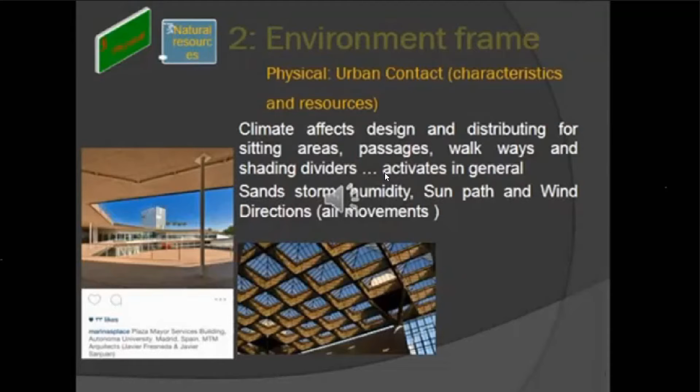These spaces should attract the teenagers, which is almost the age of the users and the students, as well as the staff members, to be in relation within the urban context.

We have to again focus on some changes happening in the environment related to circumstances like Corona and whatever. So how far, when we accommodate a design, can we find the distances and supply the information to be on the safe side.

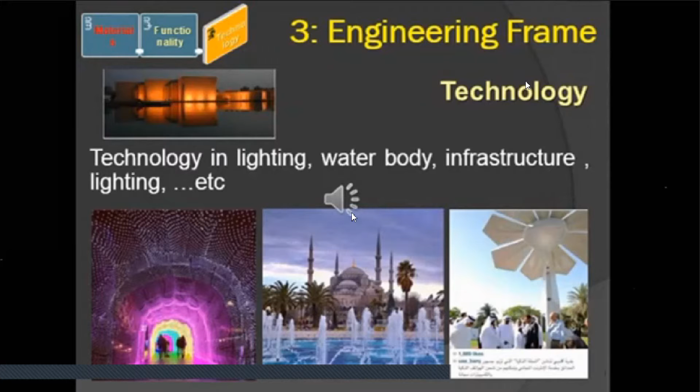We need to put in vision in design that each part should be functionally and economically easy and visible, and not only for show. Every part should be functional and in a proper way.

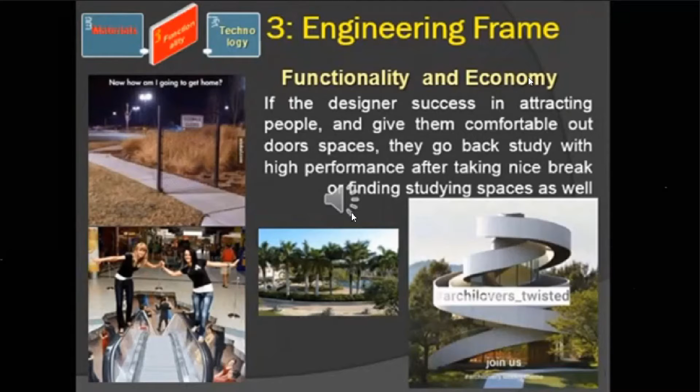Selecting material is a highly important consideration when we design these outdoor spaces as well.

So in the design criteria, as we said before, we went for selecting the proper species for the plants, as well as for the hardscape elements in terms of flooring design, lightweight structure, lighting elements, water elements, and even sign design and so on.

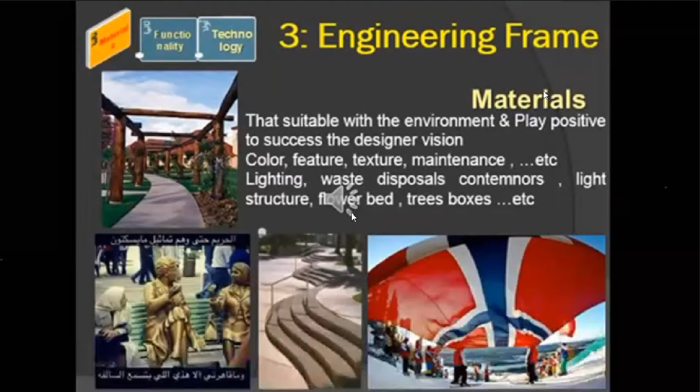The phases of the project have been divided into 5 main phases, as explained in these slides.

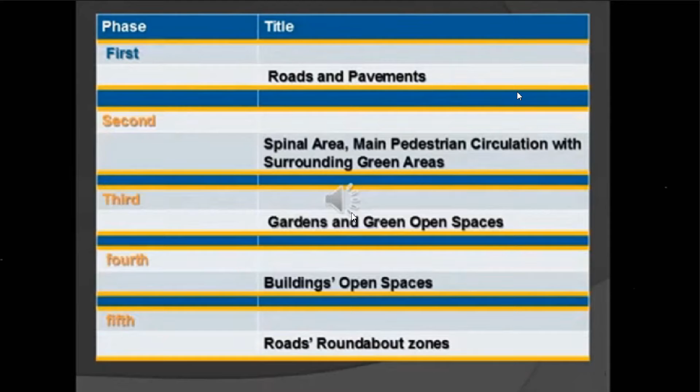So an important part is how far we encourage walkability in this university. The design ideas depend on dividing the movement of cars separately from the movement of users—walkability, bicycles, and so on. So we divided the circulation to make it clear and safe for everyone to use in the space.

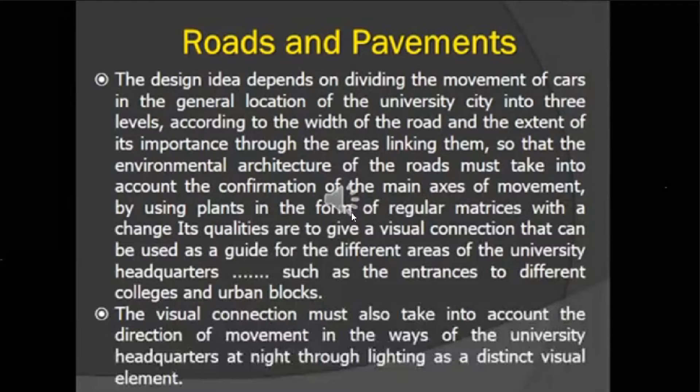To encourage walkability, we can see in this figure that there is a clear separation between vehicle circulation and the walkability issues in the campuses.

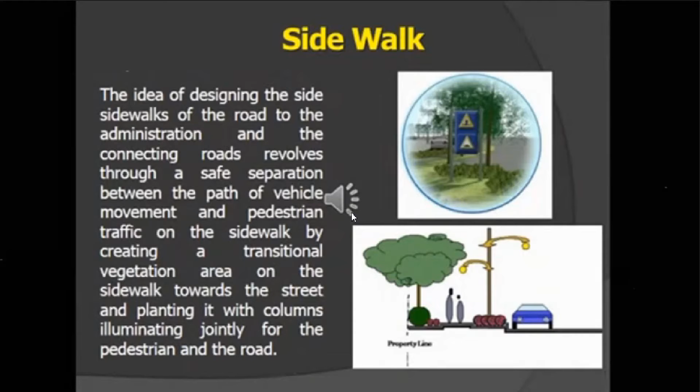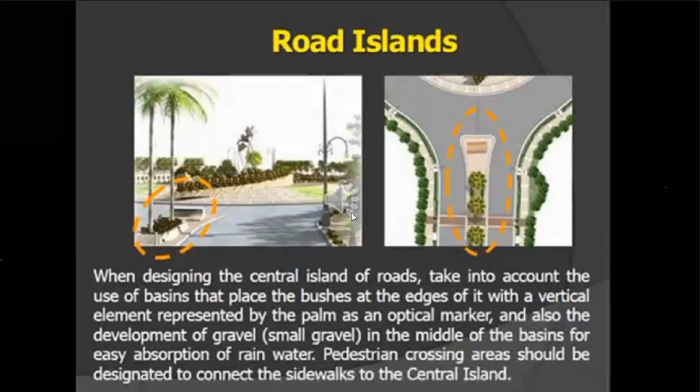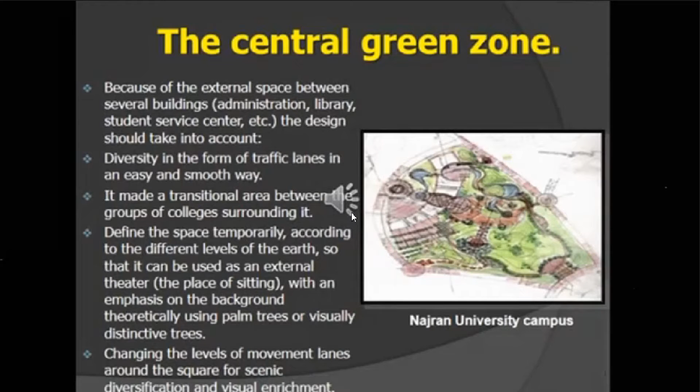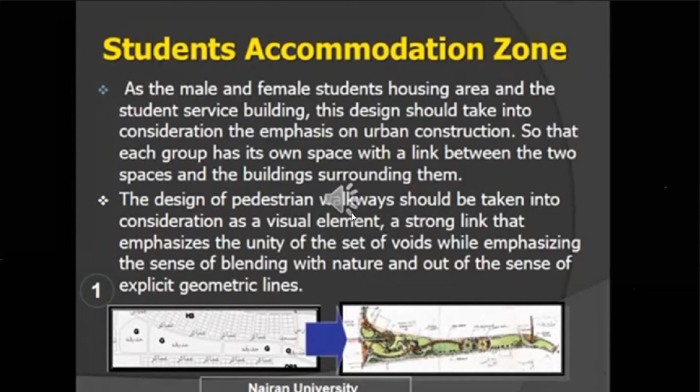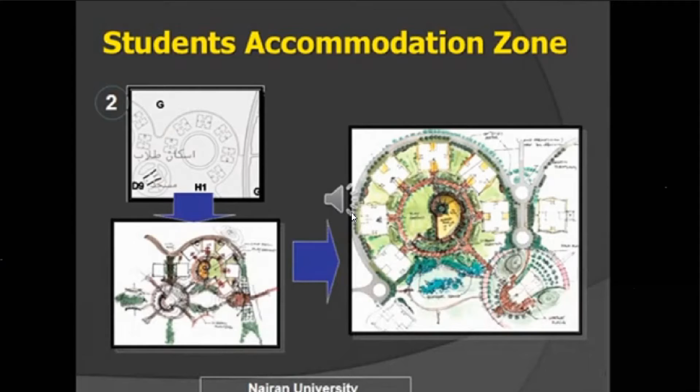Using the outdoor spaces in the student accommodation is meant to enable students to study after finishing the educational day. As we can see, we focus on making social interaction possible, as well as giving plenty of areas for learning, education, studying, and sharing experience between students—to enable gathering areas in this zone.

This zone is related to active days, in terms of educational days or learning time. So this comes from the student approaching a place, a transition, or having a destination. This type of circulation has been carefully studied.

As we can see, how far we play with the pattern—this pattern becomes like a landmark, unique for all the spaces within the area. There is emphasis for the circulation, a nice color, and this pattern leads to show the circulation as well as the gathering spaces. We can also see a transition between corridors in a nice way.

As we can see here, we focus on solving the roundabout in different landscape architecture work in terms of statues as a landmark. This landmark acts as an attracting point and shows the circulation and directions between spaces.

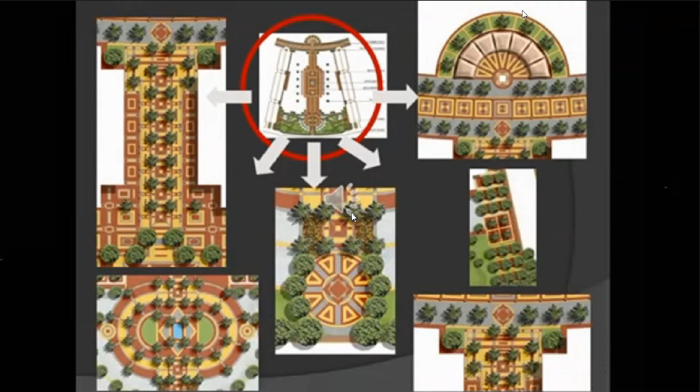We can see here, even for this small roundabout, that one theme has been followed in all the university. So this theme respects the main concept and the main philosophy of the design. There is one line for our design that had been applied even for the roundabout, speaking of the soft and hard, as we saw in the previous slides.

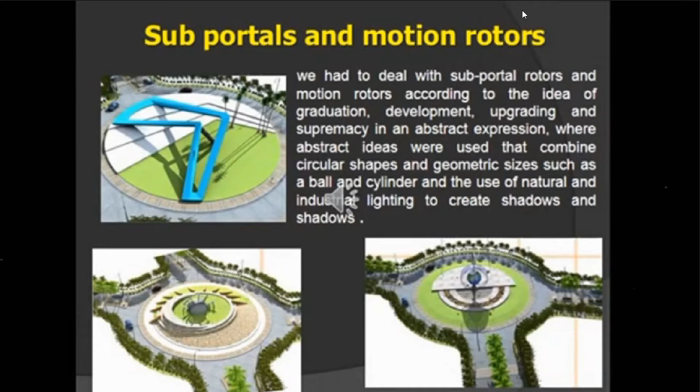We can see here even for the cul-de-sac or the closed-end routes that these streets, it is closed-ended and it is again has its value, and it's important, had its care in design for even a small part in these open spaces. We care about even the end of the streets. This gives a message to users that if someone cares about you even for the minor part, that means there is care about every part of your time in the university.

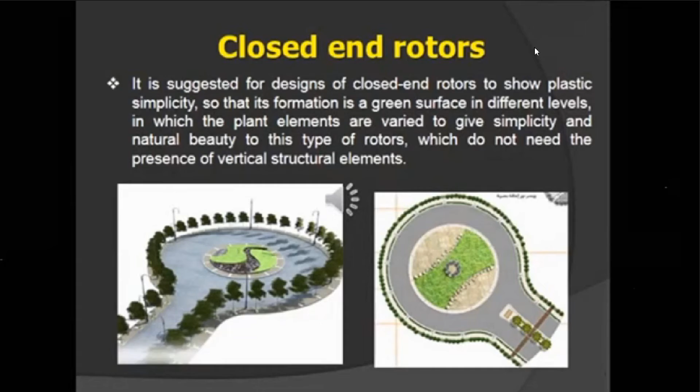Ending my presentation, it should be noted that the main frames helped the designer for these universities to meet the user's needs and respect the human dimensions in this area, and the resulting comprehensive design for such universities plays a very good point in encouraging users to go for outdoor spaces in a healthy environment and encourage walkability, which is one of the challenges in designing universities.

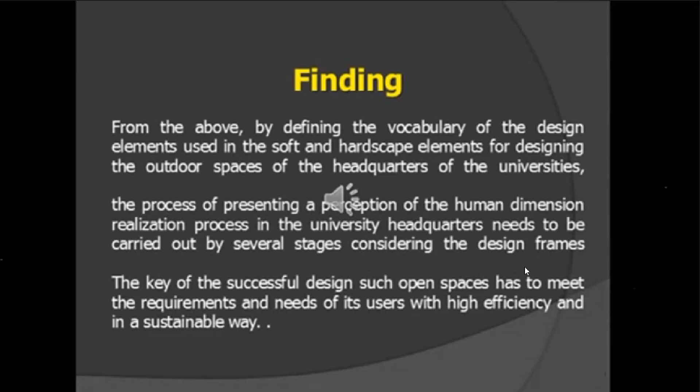End of my presentation. I hope that I covered the points very quickly, and I acknowledge the conference for this opportunity. Thank you very much.

Hello everyone, this is Donia Zhang. Today I'm going to present courtyard housing around the world, a cross-cultural analysis and contemporary relevance.

Set within the universe, humans need a shelter for peaceful existence, a space where one can observe the interchanges of the sun and the moon, day and night, wind and rain, and the seasons. This space is a courtyard.

A courtyard is a special place that opens to the sky and often to the earth, surrounded by rooms, trees, plants, and flowers. It provides residents with daily contact with nature and is usually the liveliest place in the house.

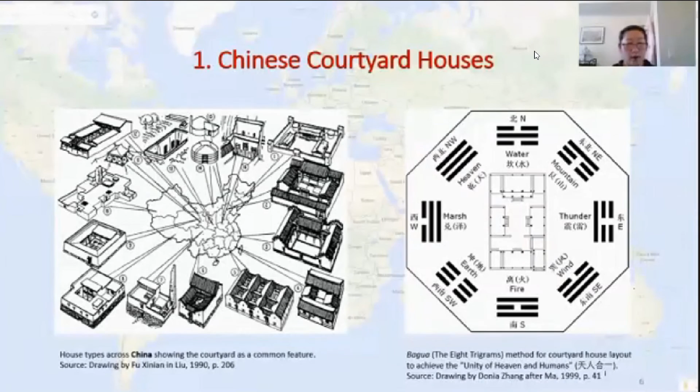A traditional Chinese courtyard house will normally host an extended family of 3 or 4 generations. Social hierarchy was clearly expressed in the spatial arrangement of some extensive courtyard houses.

After entering a typical Beijing Siheyuan, one would immediately enter the inverted south hall that was sitting south and facing north, which was normally used by male servants and the gatekeepers.

The central halls, serving as the living quarters for the oldest generation and the guests, was placed along the north-south central axis facing south, and was the highest and most exquisitely decorated.

When there was no guest, the central halls was used as a study or places for ancestral worship, conducting daily activities, holding life cycle events, having seasonal festivities, and so on. The central halls symbolized family unity, continuity, and the power of family clan.

The east and west wing halls were linked to the cardinal directions and the social hierarchy. They were the quarters for the lower family members, such as concubines and children, and were less decorated. Spaces for wives and unmarried female family members were placed deeper in the northern halls.

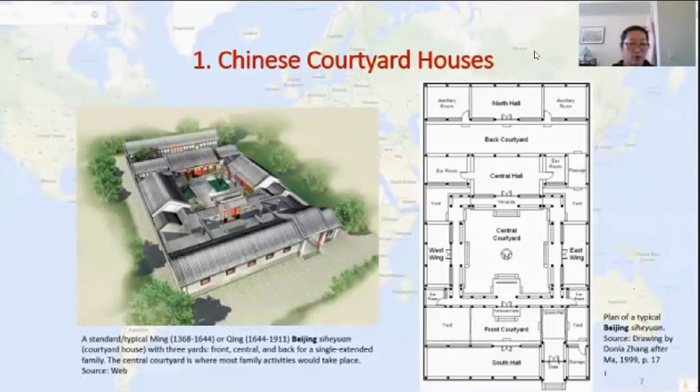Family life was peacefully played out in a finely tuned classical Chinese courtyard house. Traditionally, the courtyard was a space for domestic activities. Cooking was normally conducted in courtyards in summer for reducing heat indoors.

Tables and stools were placed in courtyards for study or recreation. Children would play in courtyards without adults having safety concerns. Pets, plants, and flowers were also nurtured in courtyards.

In southern China, such as Suzhou, where the climate is generally warm, scholars and artists would regularly meet in courtyard gardens of private homes, where they could actively socialize, quietly contemplate, philosophize, compose and read poetry, paint, play games, drink tea or wine, pick herbs for medicine, and so on.

Many of these fashionable pastimes were practiced well into the Song, Ming, and Qing dynasties. So, Chinese courtyard gardens functioned as spiritual and material refuges and facilitated a cultured way of life.

Courtyard house is an indigenous architectural style in India as well, whose design was guided by a square mandala as a representation of the cosmos. The diagram is divided into a square grid with a network of lines running from north-south and east-west, each quarter designating the place of a god, with the central square left empty, symbolizing concentrated energy and the metaphor of the cave in the heart, in which soul or Atman resides.